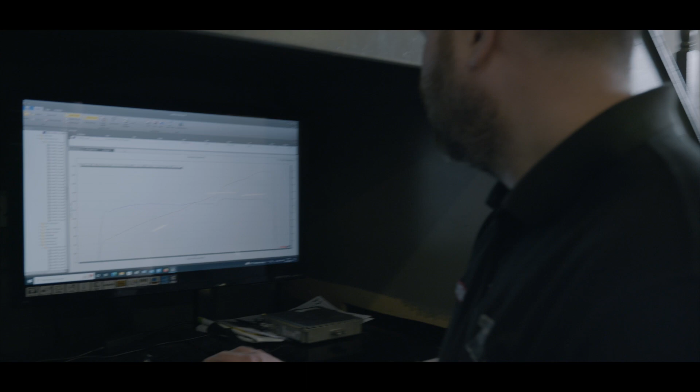Okay, so first run done, that's the base run, just the K Pro fitted with a Honda file on it. Actually not too bad, sometimes they can be really bad. You can see the dip here where VTEC comes in, at 5850. But you can see here, this is your fueling, it's pretty much close, very, very close.

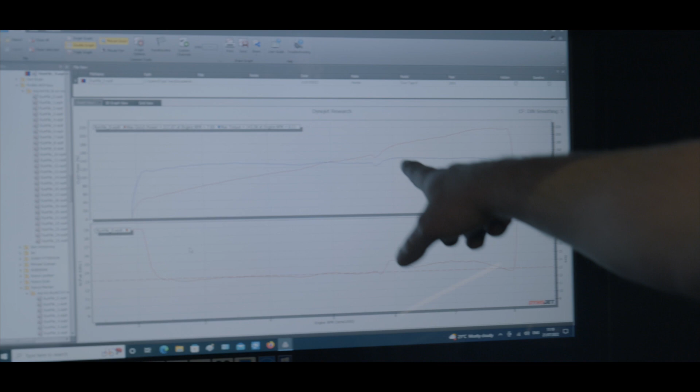Wee bit lean there, at 5000. And then when VTEC comes in at 58, it goes unbelievably lean, and it stays really lean, literally until it hits the limiter at 8100. You can see all that, Mark? It hasn't really shown the dip - the dips are usually a lot more severe than what you're seeing there.

So what we're going to do now is upload a previous file that was in a car that came into us. What we're trying to show is that anybody with a laptop can literally go in and hit the upload button on their computer or ECU, load a file into it, not really knowing any of the information, whether it's correct or specific to that car - which obviously this wasn't.

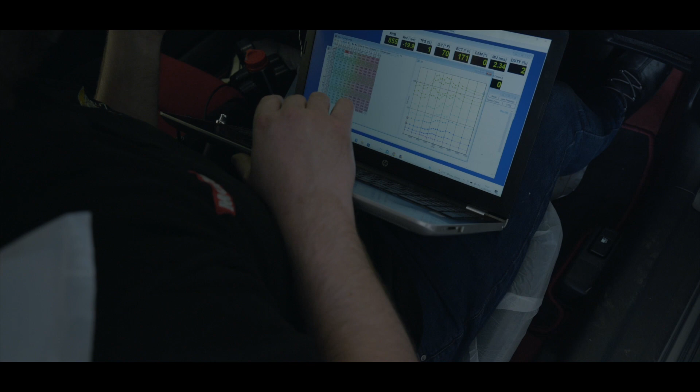If you know about Honda, you have so many files in your car, so many maps, all brought together, but this is just showing a file that was put into a car that was apparently mapped. This is somebody did this, I think, at home - they literally got the file, opened it, and hit the arrow. That's it, done. That's not what you're paying us for.

So what we'll do is go ahead here and do a run with this file. If I see anything - I'm pretty sure I checked this file before, it was okay, but that was it, just okay. You don't know whether over a long period of time it could have caused dropped valves or melted pistons. We don't know, but I'll be watching it anyway to make sure if I see anything starting to go wrong, I'll just kill the dyno run. We'll go ahead, do a dyno run and see what it shows us.

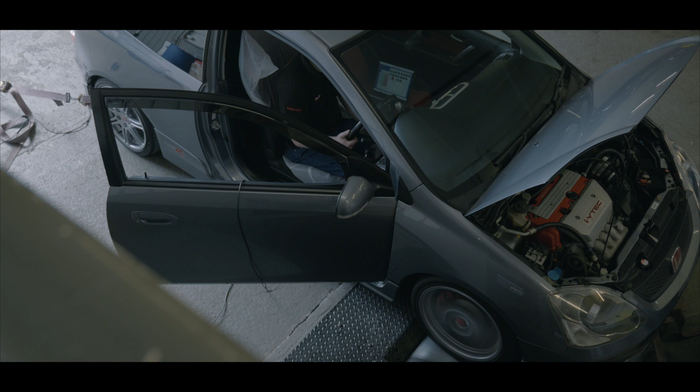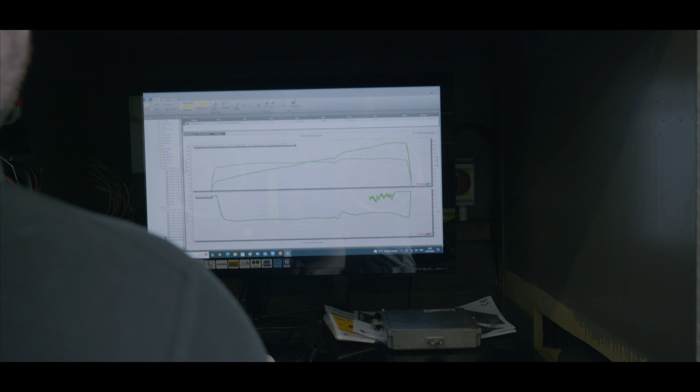Bits of that looked super lean, but the car didn't detonate. I'm pretty sure if that file was left in, there would be some damage in the not too distant future. So, okay. Yeah, can you see this, Mark? Yep.

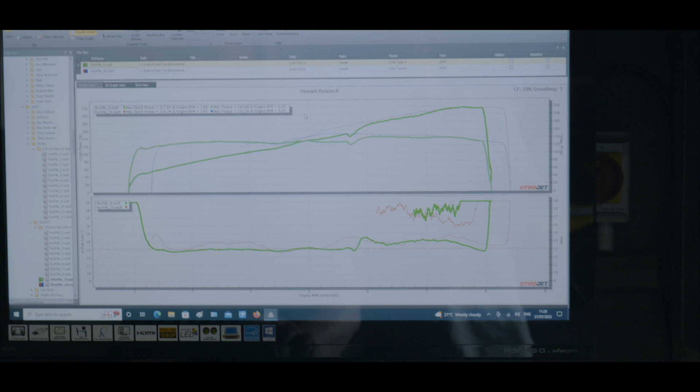The car gained power. Now here's the thing, you can see where it gained power, I'll show it up here. You can see in the mid-range, this file gained power in the middle there where VTEC's coming on at 4,000. You can actually see the torque drops power, lifts, and then drops again. So the VTEC's far too low.

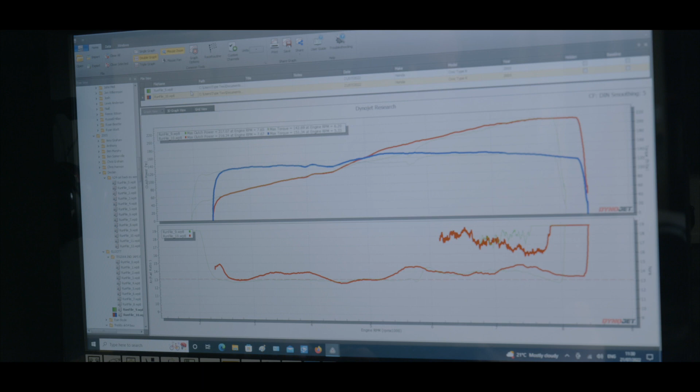Either that, or the composite cam tables haven't been set up correctly. I'm not sure, I haven't really looked in depth. I think we did one dyno on this file, I just started from afresh. So you can actually see there it gained 9 foot-pound of torque, but if you look, I'll try and show you, compare it.

This is your AFR, so you can actually see somebody's actually changed the Honda file at even low down. If you look there, this is our guideline of AFR, 13:1 AFR, which is perfect AFR for full throttle pull. So you can see here, right up until pretty much VTEC point on the Honda file, the AFRs were pretty much there. We can smooth out a bit, but they're pretty much there.

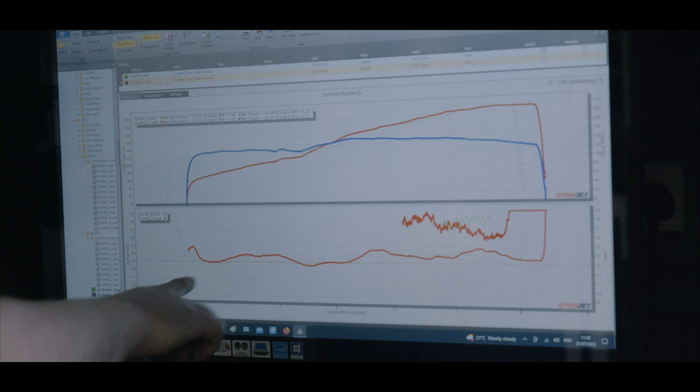And if we'll actually show you on this other file, it went lean, hitting the 14s, which is still okay, but it shouldn't be like that. It hit the 14s, was about 3,000 until 4,200, and then it was okay. It hit VTEC at 4,000, it was okay until about 5,200, and then it goes lean, and it's really stayed consistently lean until it sort of richened up a bit.

But I was watching it there at the highest RPM, and I'll actually show you here. Yeah, it was 13.4, which is okay high RPM, but the car hasn't made any substantial power really. There you can see it's 14.5, 14.7, which is perfect AFR for idle and for cruising, but not for full throttle pull.

So I'm pretty confident saying if that file had been left in the car for, I don't know, weeks, maybe a couple of months, and the person was maybe doing track days with it, something would have went wrong. There could have been a dropped valve or a melted piston, we don't know, but surely you don't want to find out.

Right, so next we're going to go ahead and tune this car now, and make the file specific for this car, so that AFR line is pretty much perfect the whole way along, and then see exactly. I'm sure we should be able to make another maybe 10 odd horsepower and definitely 10-15 foot-pound torque.

Okay, so obviously quite a bit of time has lapsed. Me and Mark have been here working away at this. So what I'm going to do now is show you. Okay, so I've actually got a wee bit more work to do on this, we're sort of getting tight for time. That'll be cleaned up for the customer.

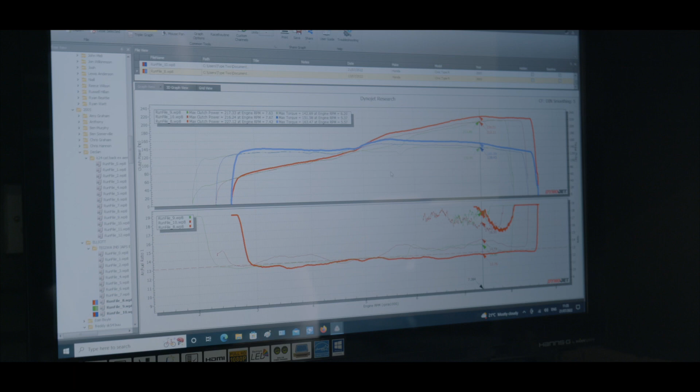But okay, so final figures. This is one of the things that point I was actually going to make, that peak figures sometimes don't show the whole story, but I'm going to be able to show you a comparison. So the factory file made 217 and 142 foot-pound.

The file that was put into this other car actually made 216, but it made extra torque, 151 foot-pound. We've went ahead and cleaned up the fueling, it's a wee bit rich here too, minimal at 6,000. I'm going to go back and sort that now, but the car's now made 227 and 163 foot-pound, and you can clearly see the difference, let me show you.

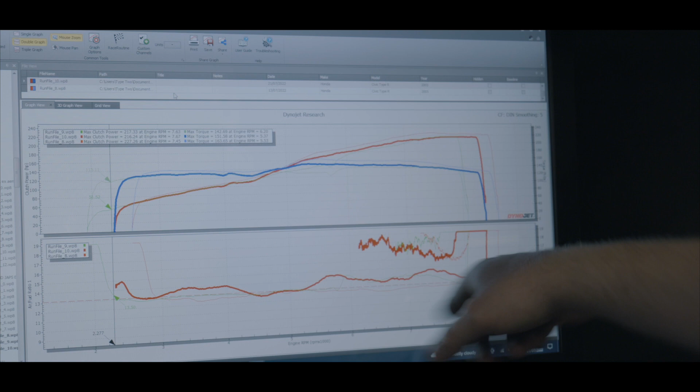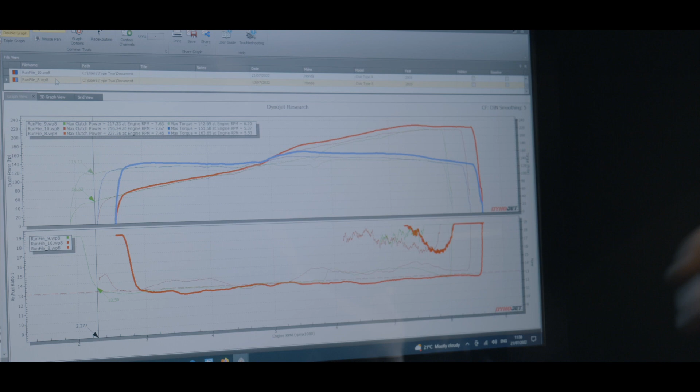Right, okay, start again. So what I'm going to show you now is the AFRs on the file that was loaded into the car that nobody really knew about. And then you can see ours is pretty much running on that guideline. It's actually run a wee bit rich, which means I'll be able to lean that off a wee taste, but I can obviously log that on the dyno.

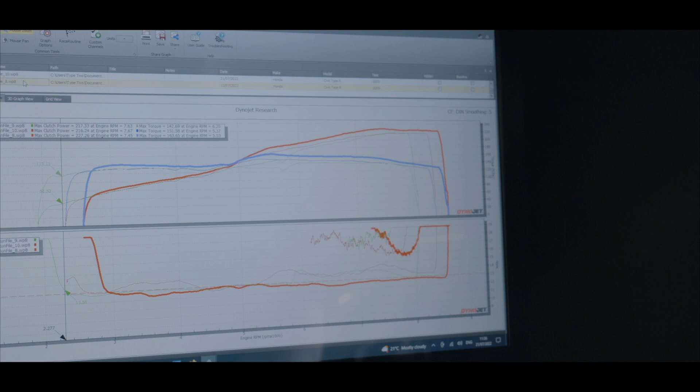And it might actually make a little more power again, I don't think it's going to, but 227 and 163 foot-pound is a good strong number for a car with this setup. So this customer will be like, oh my goodness, this car feels night and day.

Okay, so just to round this video up, pretty much the point we're trying to make is that just uploading a file into a car from a random car, or from somewhere you find, even in this case in KManager with Hondata, it's not the best thing to do, and it can cause some serious problems in the future. Hopefully this video will help everybody who's interested in tuning their car, whether it be a Honda or not.

That you need to use somebody reputable, or if you're going to tune yourself, you need to put the time in to gain the experience to know exactly what's right and what's wrong. Because sometimes you pay somebody 150 quid to throw a file in your car, it's not the best deal. You'll end up paying for it massively with engines, so you really don't want to be doing that.